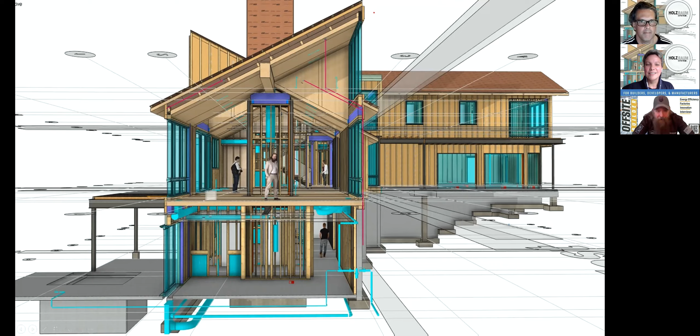Talking about our team, this is us. We are three co-founders of HolzRaum System, and we always think it's important to introduce ourselves because it makes it a little easier to understand why we're doing what we're doing, since we're looking at a lot of different perspectives, coming from a lot of different backgrounds.

So I am an architect. I was trained in Germany, and I'm also a certified passive house consultant, and I really like to do energy modeling. And then there's David Hessler.

He is actually a biologist and a software developer. And then Steve Hessler, he is a passive house builder, a certified passive house consultant, and also a timber frame and structural designer with a background in CNC production of building components. So there's quite a bit of different things that we always think about and talk about.

Steve and I actually met, I think, around 2015 at the first Passive House gathering in Philadelphia. Philadelphia by now is a pretty active Passive House community, but back then there was nothing really there. So it was really nice to finally connect with other like-minded people in terms of Passive House.

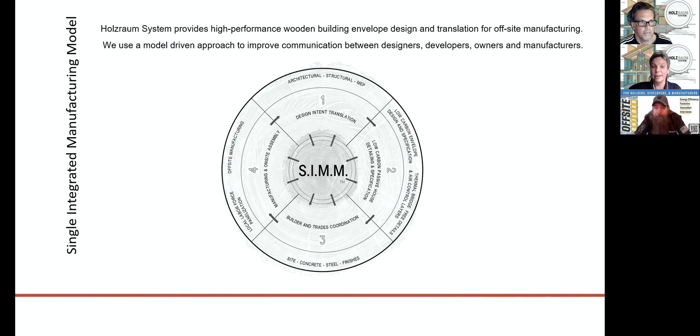So this is the project we're talking about: a very large single family home in Big Sky, Montana by Reid Smith Architect. This is actually a hybrid between a CLT floor and roof system and light framed panels. It's a pretty intense and complicated project, and we didn't want to show it to scare people away, but just to show what's possible with this kind of approach.

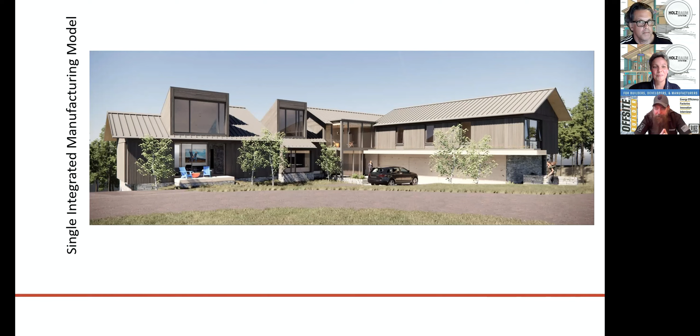To kind of highlight what a SIMM is, we need to show and explain what a BIM is first. What we get a lot of times is a BIM model or a volumetric model from architects. Volumetric models are really good at conveying design intent, and for the architect to communicate in conveying construction strategies and explaining spatial relationships between assemblies and building components.

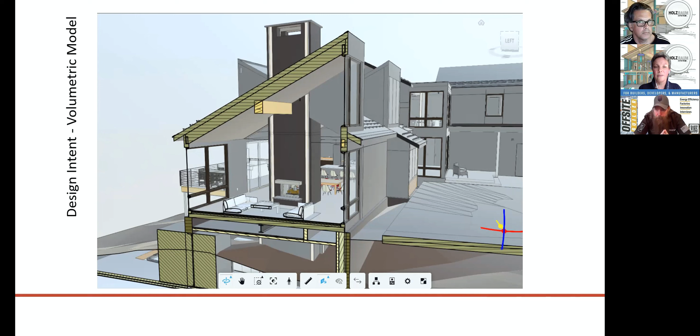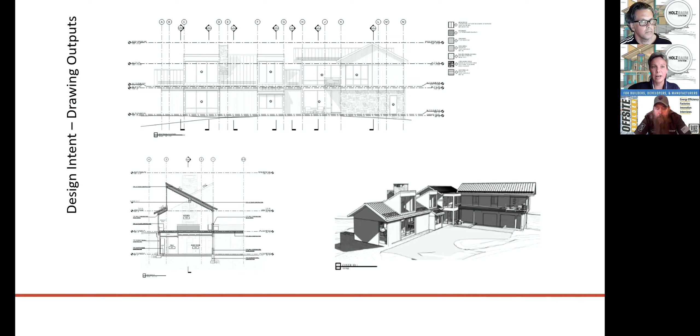The outputs for a BIM model, or in this case a Revit model, are what we kind of know: floor plans, elevations, sections. This is very good at architectural documentation and is absolutely needed in the design process. It's really good at showing your elevations, your heights, your schedules, window schedules, finishes schedules, and all of this.

So then this, on the other hand, is a parts-based model, and that's what it looks like. You can see the difference. We moved something that was a volumetric model into something that shows every single piece that building is built with.

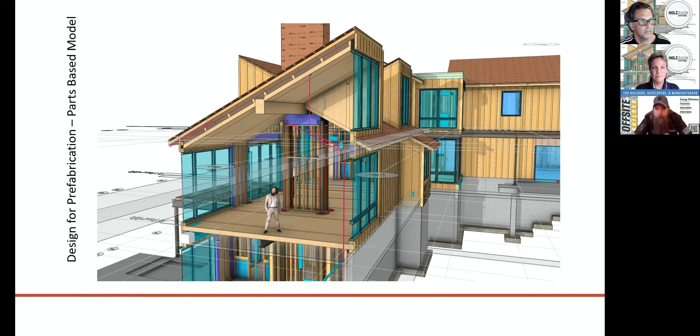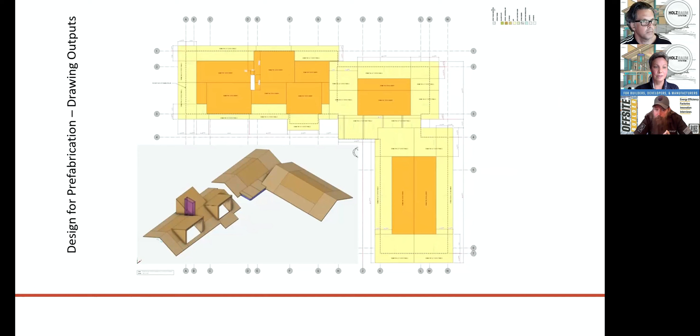This is basically the outputs of a SIMM model, which is very different from the outputs that we saw before, because this is, for example, a 2D geometry review set, and it includes installation drawings and panel shop drawings, and in some cases machine files.

If the decision was made to off-site manufacture a panel, then the design intent must get translated into actual parts, and a 3D parts-based model is necessary. That's a really important step: once you make the decision to go with pre-manufacturing, you need a parts-based model, there's no way around it. With modular building it's slightly different, but if you go with panelized, you just have to do it.

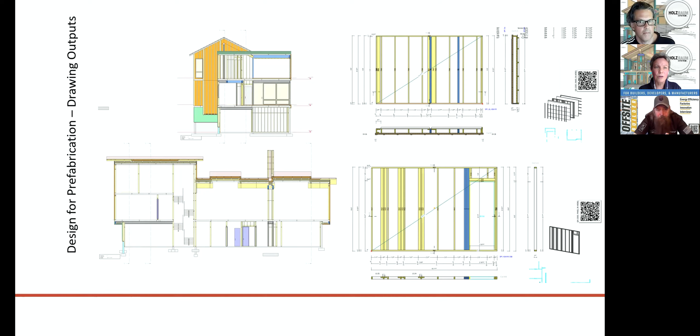That's kind of where we saw our opportunity, because once you have this parts-based model that has to be built for everything the manufacturer is going to produce, there's quite a bit more opportunities that can be taken advantage of.

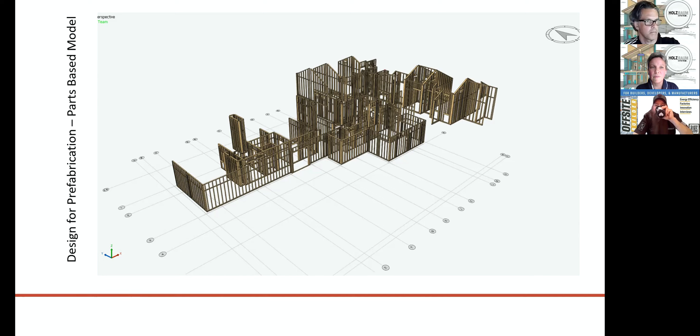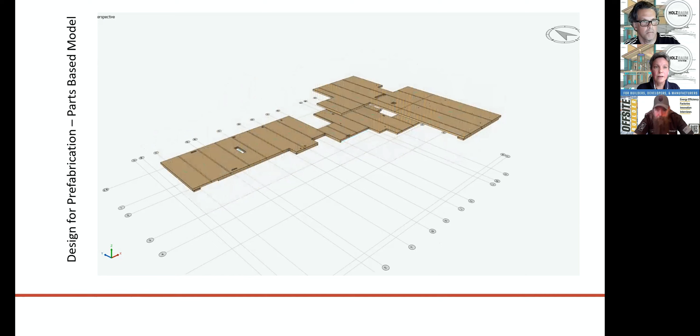This is just showing what the manufacturer, if it wasn't our SIMM modeling approach, would actually produce, which is basically what they are going to build. So this is a model that would come from a manufacturer. These are exterior walls, and in this case CLT floor panels, roof panels.

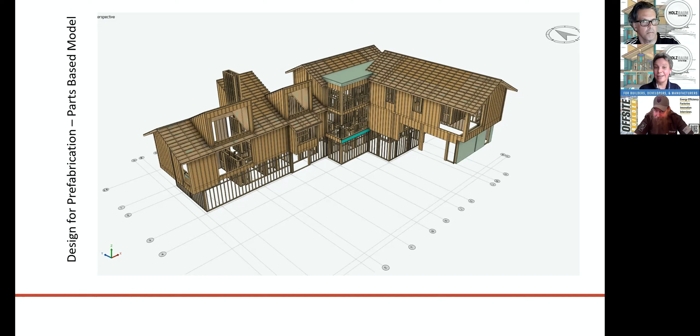Once we have all these basically production fidelity building components modeled, we saw quite a bit of opportunity to align and clash detect these parts against all of the other building perspectives. That's kind of where the SIMM comes in, where all of a sudden, because we have this model, we can start looking at the load path, for example.

This model was provided by the structural engineer, so we actually didn't model it ourselves. We had to tweak it, but we try to use everything that we can get from engineers and integrate that into our model. So we don't always model everything ourselves, we're trying to reduce redundancy.

And then we were able to check this against foundation drawings and actually generate the model that works with the foundation drawings. And then we are able to feed that back out to the on-site construction manager to check dimensions.

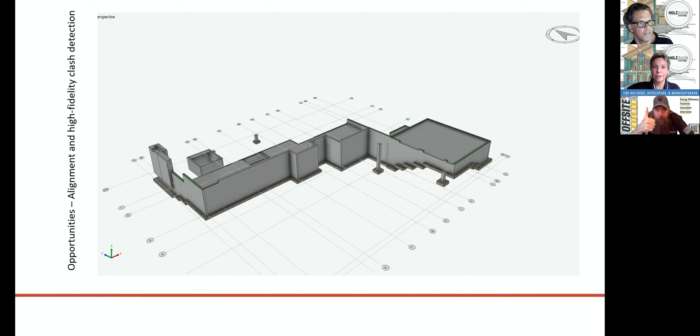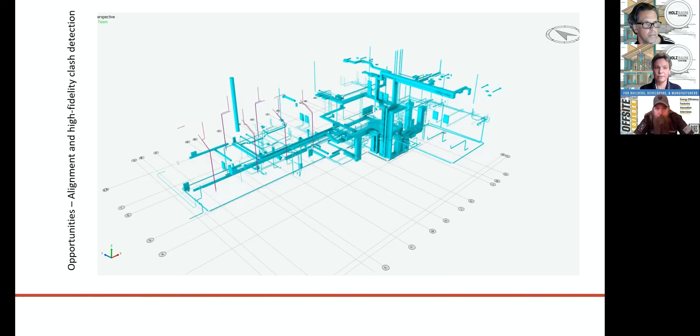Then we are integrating the whole MEP model. Again, this was not built by us, this was given to us. This is a Revit model that we were able to integrate into our SIMM.

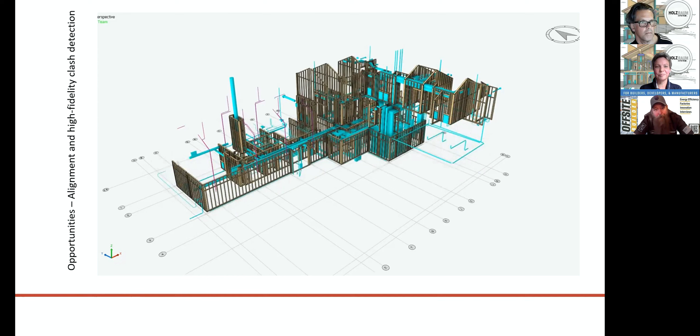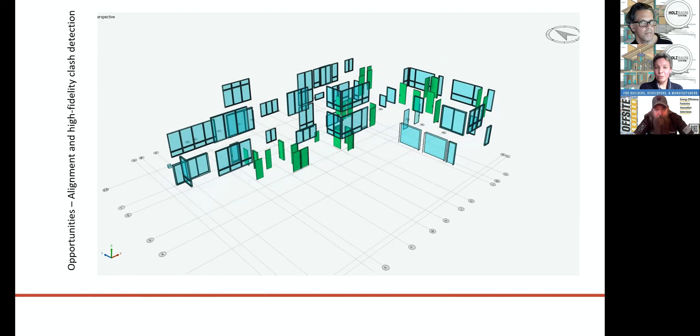And then we go ahead and really look at all these different perspectives against each other: the load path, the foundation work, the interior walls, the floor panels, the roof panels, accurate window and door units and their placement. That was again defined by the architect's Revit model, so that definitely has a lot of value in terms of geometry and where things are.

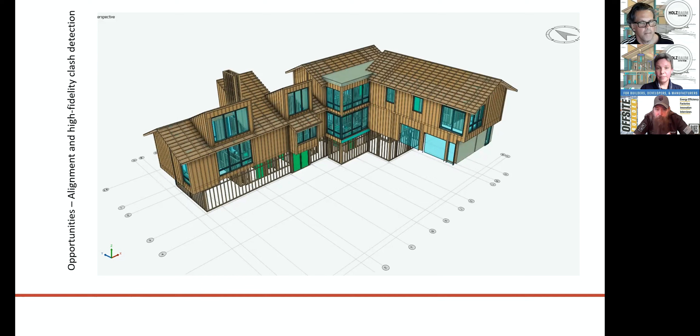And then, this is basically looking at a holistic model at the end, and Steve will show a little bit more of what that model actually looks like.

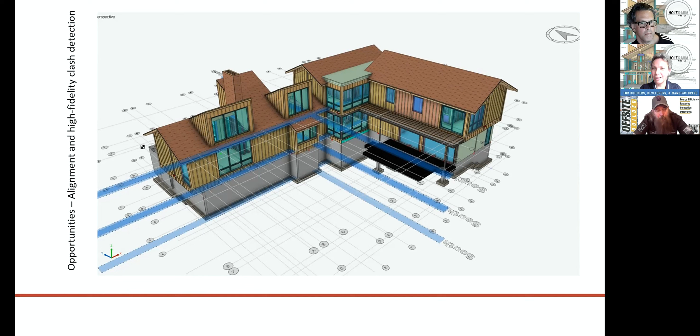And then to take it a step further in this project, we were able to actually integrate a terrain model, or we were asked to integrate a terrain model, which was provided by the excavation contractor. And then again, we checked it against the concrete.

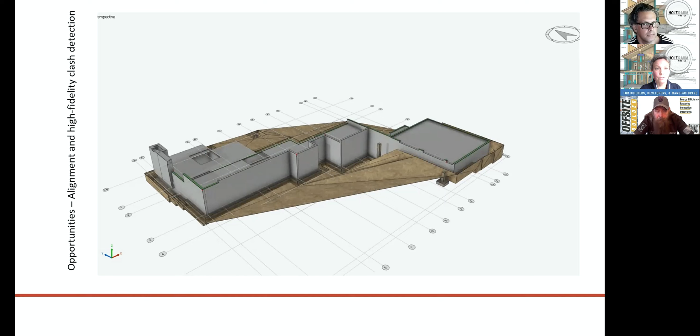So then overall, all of our details are developed with focus on airtight transitions and thermal bridge free connections. So I think that's kind of where my perspective comes in a lot of times, with energy modeling and being the air sealing person, guru.

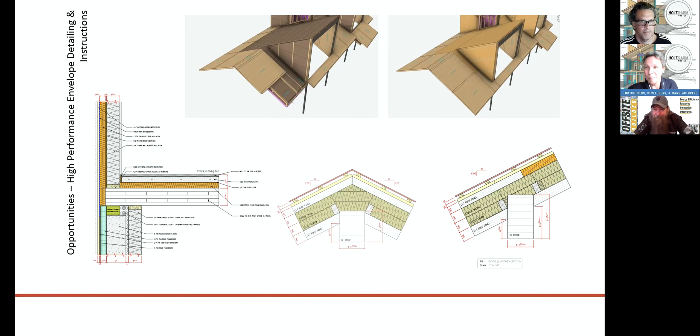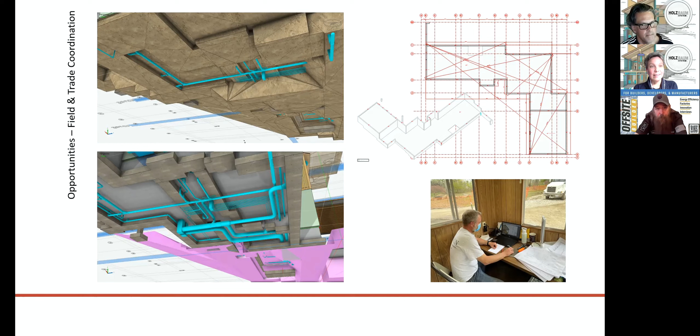He's using it to locate nailing for some specific siding facades. Yeah, so again, further down the road, it's a communication tool. You can turn it, you can twist it, and everyone looks at the same thing at the same time, right?

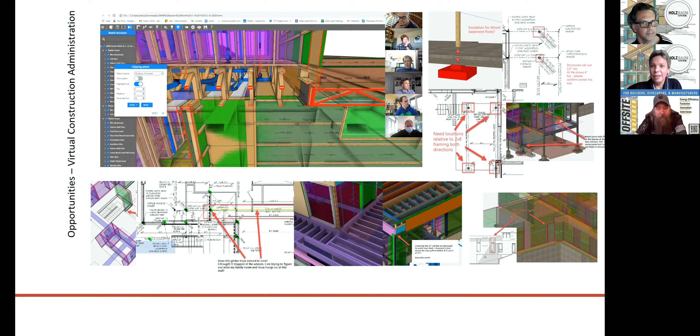And so this is what communication looks like in the SIM world, and it can look a little messy, right? But you can see that there's a lot of people looking at it at the same time. And yeah, we can make decisions on screen very quickly with everyone engaged, but we did see that we needed some way of coordinating or organizing that chaos a little bit.

So we went ahead, and that's where David, our third party, came in as a software developer, where we developed the SIM model basically as a visual database. And this is our software that's called Catch, which is basically harvesting information out of our visual database in a format that users can then use however they see fit.

And also integral into this process, it's kind of the part of herding cats, because we're dealing with a lot of people. So part of this software is an issue tracker and data storage and a few other things that we're happy to talk about later on as well.

And key to that, and I'm sure Steve is going to show that a little bit more, is data attachment. So every little piece, and that's something that's a little different too, compared to a BIM model where yes, you have layers, your walls, you can set up all these layers and there is data, but it's basically one wall, right? For us, it's every little piece that we create, if it's a screw, if it's a beam, if it's a post, can get data attached to it pretty much unlimited.

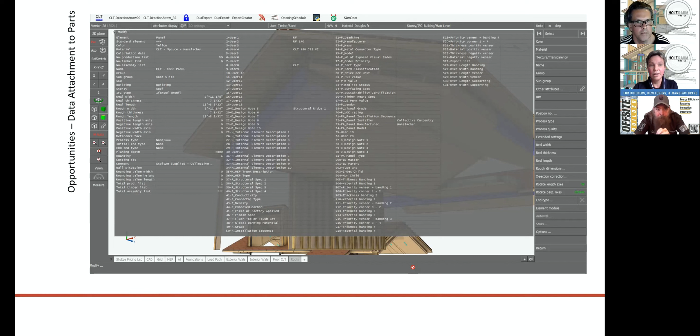And that data then, we're able to catch it or harvest it in a way that makes sense to everyone engaged.

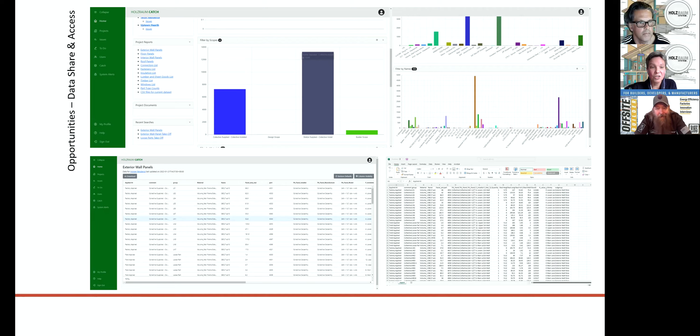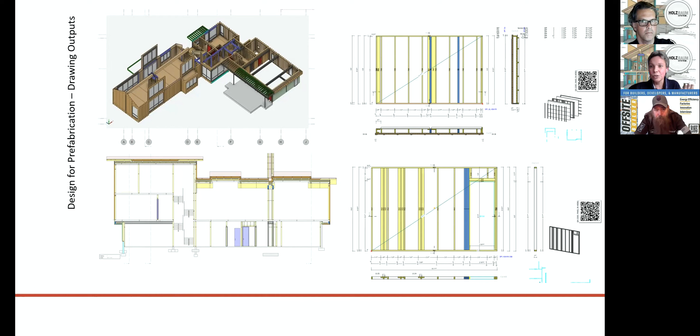And then out of that model, we basically export these 2D drawings for contractors that might want to build them in their shop, or have maybe a half automated production line. And we see a lot of potential in really engaging broadly builders locally that want to build those panels, so that we can really scale this up.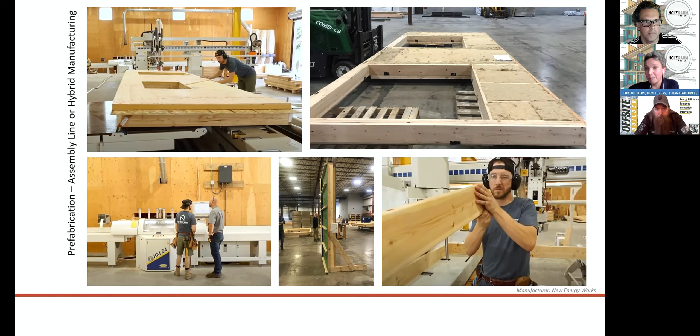And then alternatively, we can also, out of the same SIM model, export machine files for highly automated manufacturing facilities. So yeah, that's basically our process.

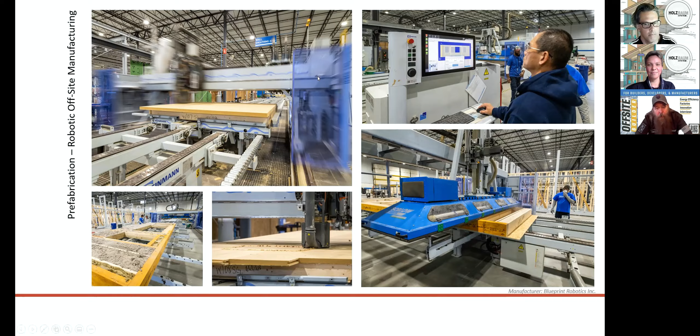Okay, it's incredible because every process you take us through is inclusive, right? It's receiving all the information from the various experts at hand, it's compiling it, and you used a phrase to make sure that the structural and mechanical didn't interfere with one another. Used a unique phrase for that, clash detection.

Incredible, and all those layers coming up with it. And Catch, when you brought me into Catch, I was like, all these tools are ready for bringing all the answers and files needed for panelized facility over here, CLT facility over here, and a stream of manufacturer parts and pieces here, there, and everywhere. It's a wonder buildings get built without this.

I'm mesmerized. Steve, I know you got a lot to add, but Ilka, this is tremendous, and you have the mic, my friend. All right, awesome. Thank you, Ilka, that was a great overview.

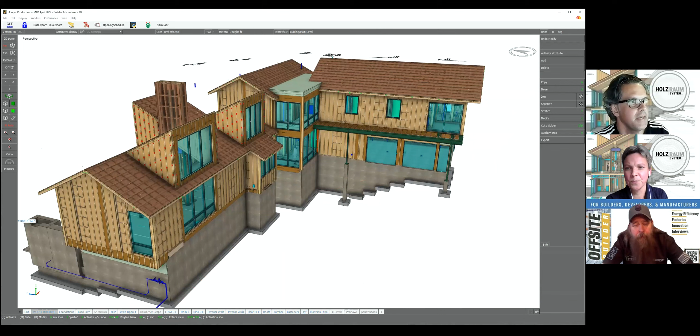This is actually the complete model, and what's kind of fun is that this is actually the version we sent to Builder. So even though it all comes from one model, we can tune some versions because different audiences have different purposes, but the content always comes from a final frozen production model.

We actually just got to the part with this project about 3 or 4 weeks ago where we finally absolutely froze, and Collective Carpentry is fabricating the wall panels, so they have all their wall panel drawings. All the production numbers for all the parts are frozen. And when we get to that point, we can release a version for the builder.

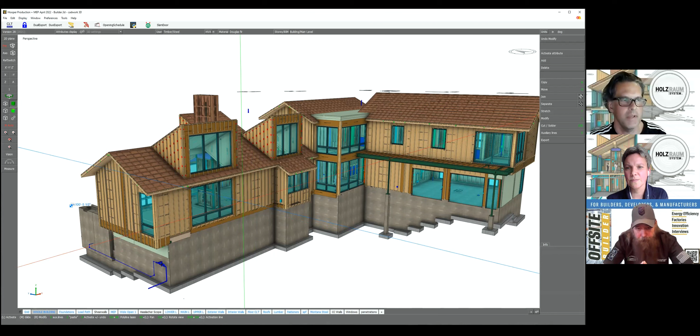So the builder actually has this model. I'll break it down a little bit, but they can grab it, and they have cadwork, so they can actually open up this model. They can't edit it, but they can grab a lot of the things I'm going to show you.

So we organize the model, you know, when we bring the design content from others, like our collaborators, it comes in from all different kinds of sources. It could be from Revit models from 4 or 5 different people, could be 2D CAD, could be just about any format.

Our job is to bring it in, filter out what's useful, and not necessarily discard the other stuff, but sort of put it out of the way, like putting it on the shelf. One of the ways we do that is we organize the building from the very beginning into what we call slices, scope slices.

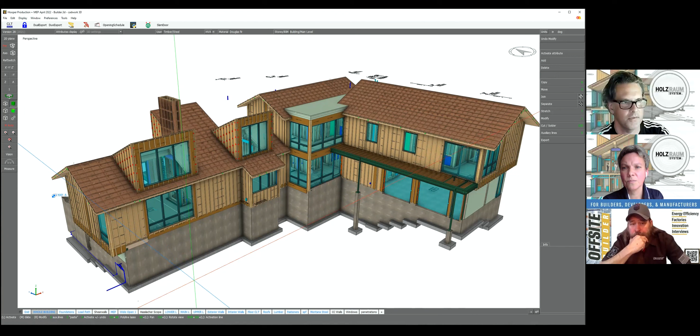So right now, all these scene tabs down here are just some of the scope slices and perspectives. We can do it on many, many different levels. But for instance, I'll just real quickly show you, so this is sort of the building.

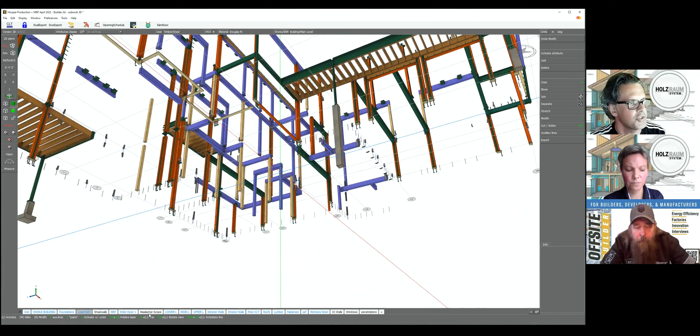And then we can look at the foundation. These are some of the load path members, so these are all local steel, and the blue is glulam parts, US glulam. There's also, I can jump over to, this is the imported CLT and some glulam parts.

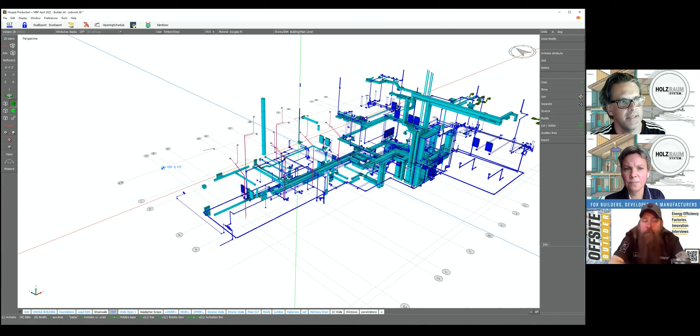So I'm going to show you how we can start to put these things together. But the point is, we break these things into individual slices, and that's one way to navigate the content very quickly. That's something we also really love about a SIM model versus a BIM model, is that we can navigate parts like light speed, whereas it's not so with BIM.

First of all, a lot of the parts aren't in a BIM model, but even if they were, you're limited a little bit by layers. Layers are great, but there are so many layers in a BIM model. What's great about this is that if I go look at the lumber—

This is all the lumber that is in the project. It's not the CLT, but it's all the spruce pine fir, the LVL, the plywood. It's things that you could get from a lumber supplier.

And what's great is if I click on one part and look at all the properties, there is a lot of data attached. You can see there's a lot of blank attribute layers, but there's also a lot of layers that are attached, and there's sort of an unlimited number of layers that could get attached.

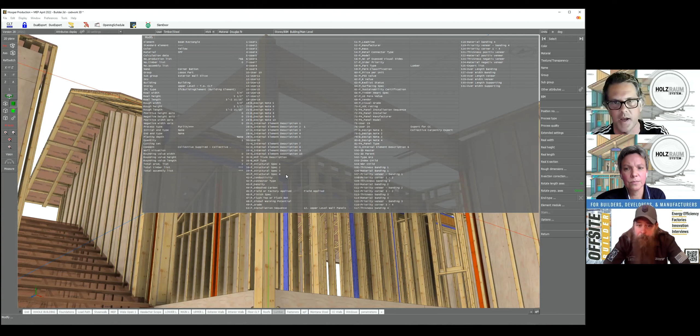Just from this screen, I know what the part number is, but I also know what panel it goes in, and if it's field applied or factory applied. There's basically unlimited data that you can attach to a part, and as soon as you attach data, every one of those attribute layers becomes a navigation tool in the SIMM.

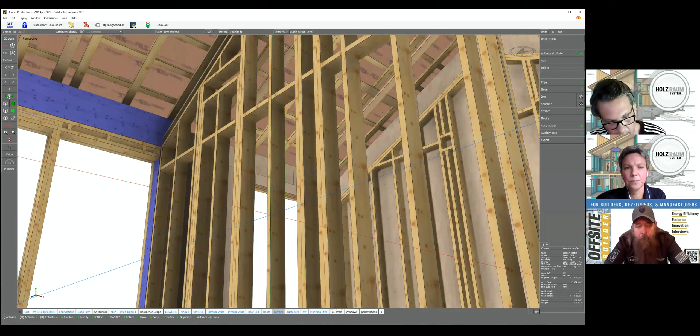For instance, if I have this part active and now everything's back on screen, I might be interested in looking at all the parts that share the same material. So I can activate along material type, and now, instead of 20,000 parts on the screen, I'm looking at just those parts.

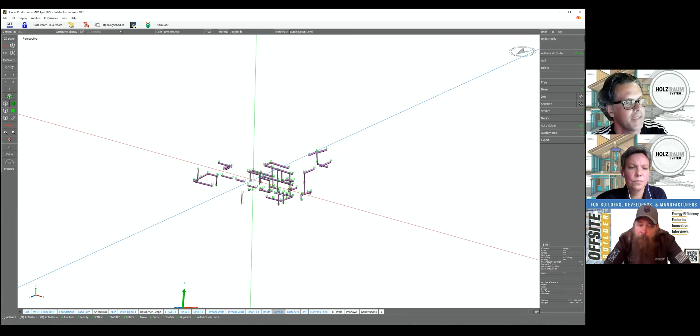If I want to look at all the glue lam parts because I activated along the same material, but I'm interested in what that looks like against the steel, I can bring in the steel. And if I want to see what that looks like next to the MEP, let's do a quick look, maybe bring the MEP engineer into a Zoom and see where you've got to clash somewhere.

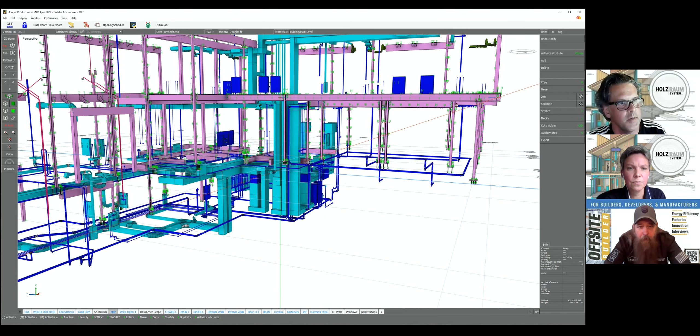Basically, because it's actually the data, the more data, the better. It creates all these little opportunities to navigate and filter content in and out. So let me go back to some of these scene tabs on the bottom.

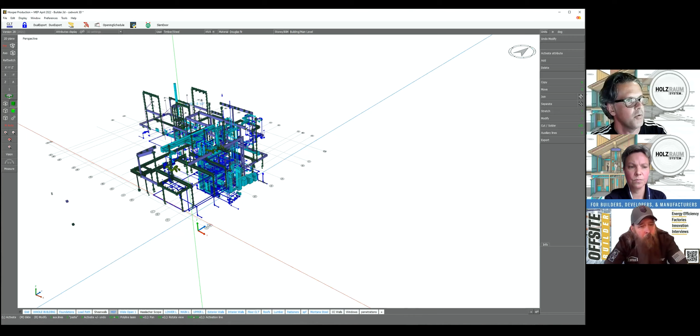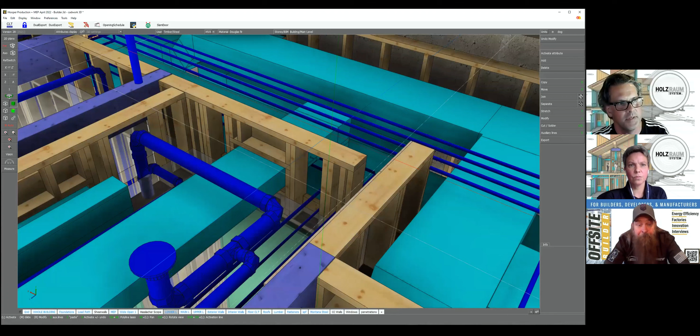Now we're looking at the lower level of the floor. I'll leave the MEP in on a couple of these, but you can imagine how useful this is in our meetings, when we're talking about how literally every interior wall framing has been clash detected and clearances created for MEP and everything else.

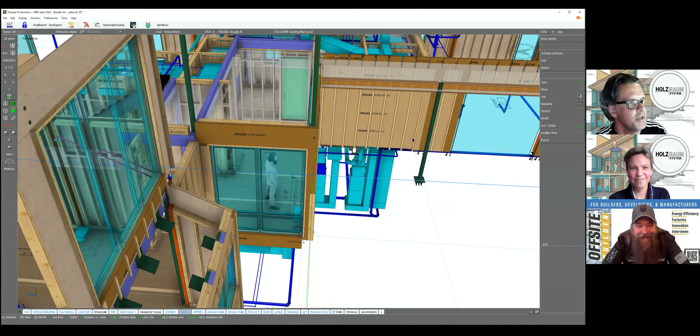On the main level, there was a lot of work with the CLT. That's a model of Mark right there. I'll show you more on the CLT in a second.

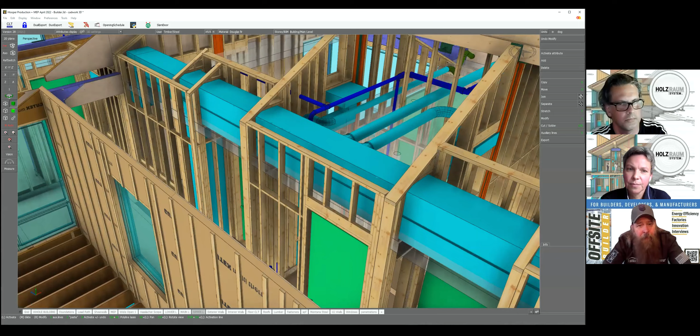I'm also seeing an option to understand the critical path and the sequencing, because often when we have these pre-made partitions and the glulam coming in with those different layers, it gives people foreshadowing of knowing what crew is coming up and what to expect, because we don't have that on a 24 by 36 black and white piece of paper. No, that's a great point.

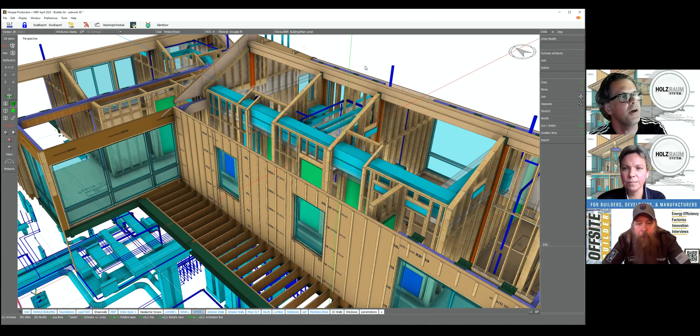If I take this part, I know it ends up in wall U10. And if I look at the sequence, there are 17 sequences in the building. This right here says part installation sequence, sequence number 12, upper level wall panels. I can do that for 20,000 parts in the model.

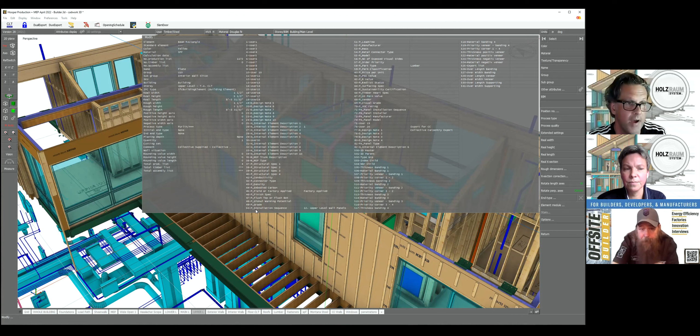Actually, this is kind of nice, I can say activate along a sequence. These are some custom HolzRaum sequences - go to installation sequence, see all our sequences. So now I could say I want to see everything in load path wood on 7. Now it should be all active. And now I'm looking at load path members for sequence 7.

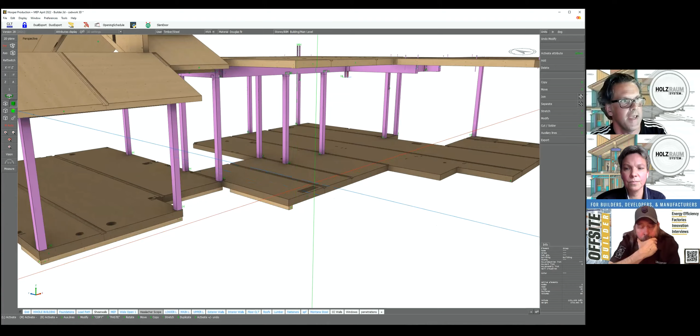And then I can say, okay, how does that look on top of the CLT? So I'll go back to Haslacher, and now I'm looking at what that would look like on top of the first floor CLT installation. It's cool because you can just mix and match between those attribute layers.

That's what I love. So we've been looking at sequence, then we moved to scope, now we're going to move to SPF. I want to look at what the SPF looks like - well, now I'm looking at all the SPF. So you can just jump around between those perspectives.

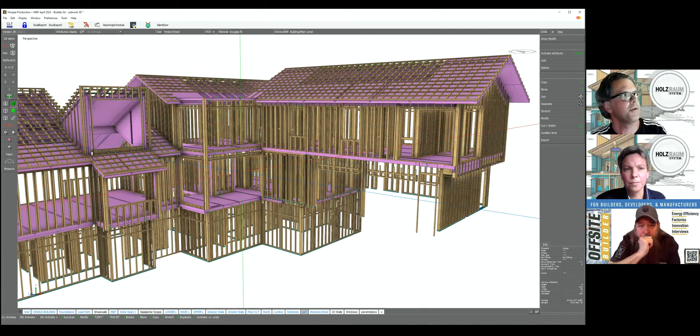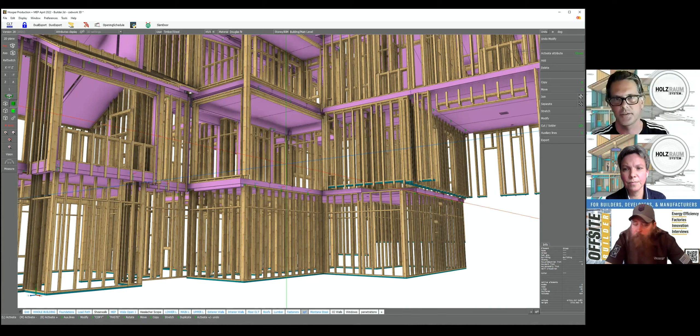Every one of those attribute layers, whether it's material, sequence, Haslacher scope, vendor, all of those things become a perspective, and you don't have to just be looking at first floor, second floor, third floor. They all become layers - that's what I really love about this thing.

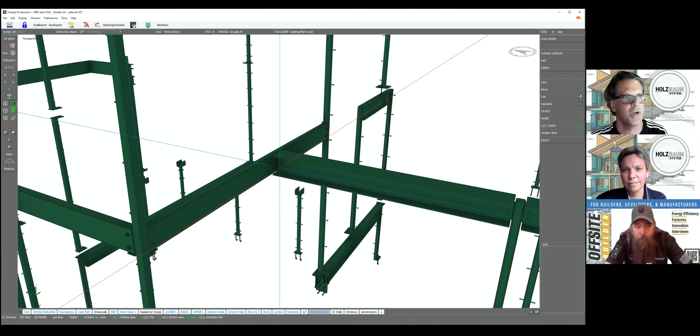I also want to give a shout out - this is one of the most unbelievable steel models we've ever gotten, and we think there's a gigantic opportunity for collaboration. We love good modelers - good modelers make our job really easy. This model is dead accurate, and it allows me to coordinate all of my SPF, all my everything, my CLT.

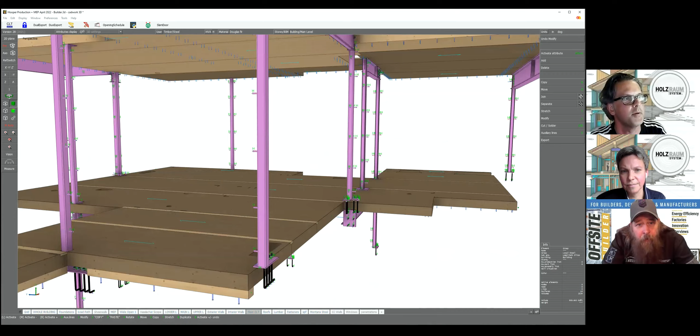So if I look at my CLT, is that accurate? I'm not worried at all about this because I had a phenomenal partner that worked with us. And if I want to look at the steel against the MEP, I also had a phenomenal MEP contractor, and they were willing to put the time in to make sure we had the format we needed.

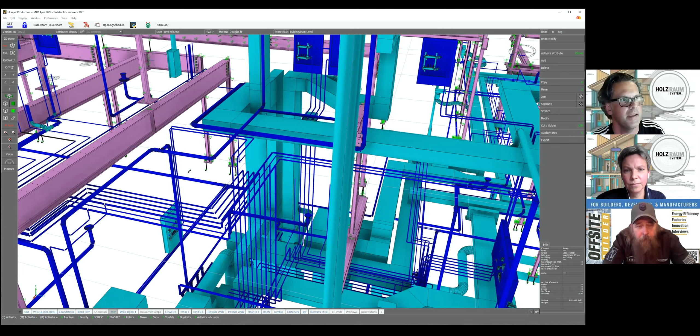What we would do is, they'd say, well, you're the only one that has all the content. So we would clash detect between structure, steel, and MEP, and we'd hold meetings and show them this stuff. Then they'd go back to their office and fix it and send it back. Finally, we'd end up with an absolutely cleared model. And of course, the architect is involved the whole time.

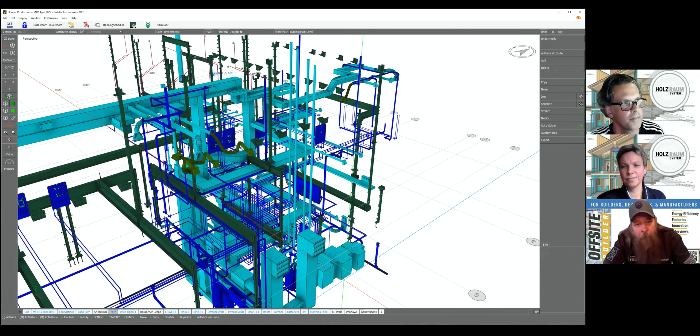Just looking at the drawing alone, Ilka and Steve, I noticed the cost savings because I can see when you show me the structure of the steel that it's already coded, whether it's an I-beam or a C-channel. And I know the fasteners, I know where it's going. I can almost tell you what size it is just from the 30 seconds I've seen you flash across the screen.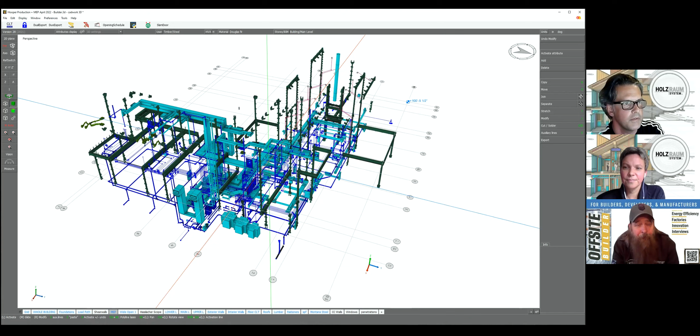That's insightful. Yeah, so let me show you a little bit more. You mentioned fasteners — I'm going to show you the roof system on the CLT, it's pretty cool.

Look at that, you don't necessarily need all the MEP. I'm going to just go with the roof right now. But what's really great about CLT and timber is for this kind of process, this works great with light frame panelization, but it also works really well... it's lagging, hold on a sec.

This is like building an airplane. All the components are decided, they're all made here, there, and everywhere. Each part and piece comes in together, and we're flying high. This is the Star Wars of the construction industry.

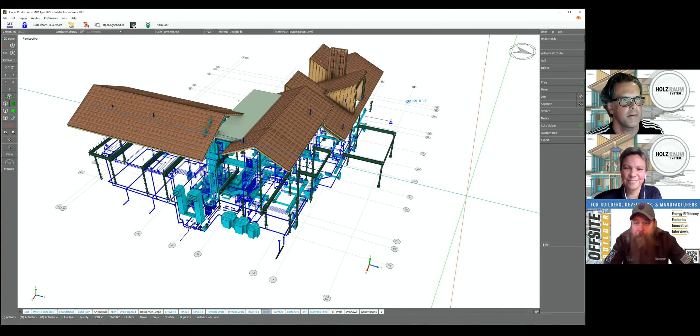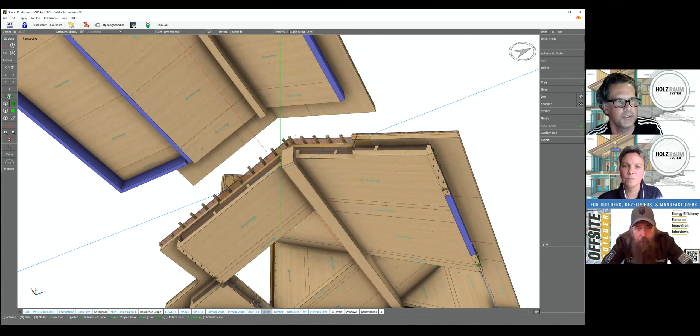So now I turned off the MEP, and now I can really look at this — the blue is our glulam that's going to be sourced in the US, but everything else on here is pretty much an import, all pre-cut and a lot of pre-drilled, from a company called HolzRaum in Austria.

So if I look at just the fasteners, these are the fasteners — I think we got down to 8,500 fasteners. Each fastener is a very specific application. And just like all the other parts in the model, it holds data that's really important to make sure things get in the right place.

For instance, the manufacturer from the CLT company basically got our model, and all the CNC work from HolzRaum comes from this model as well. But they get an indication for the people ordering it — this is not going to be pre-drilled. So that means the factory knows it's not pre-drilled. It goes to zone R1. It says who's going to install it, who's going to provide it, and in this case it's a loose part, so it's not going to be put into an assembly.

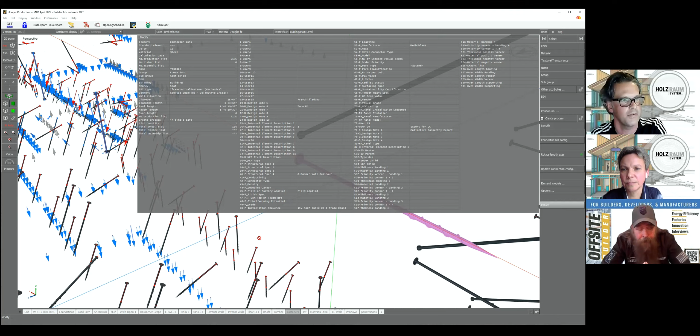So anyway, there's just a lot of different things — as soon as you have the part and you can attach data, you can really navigate the unknown a little bit. One last thing I'll show you that I also really like is, again, bringing in content from our collaborators.

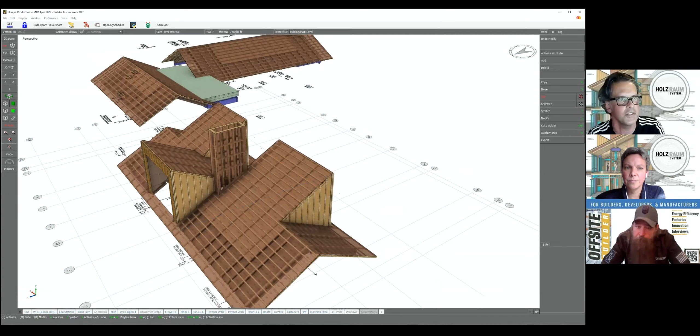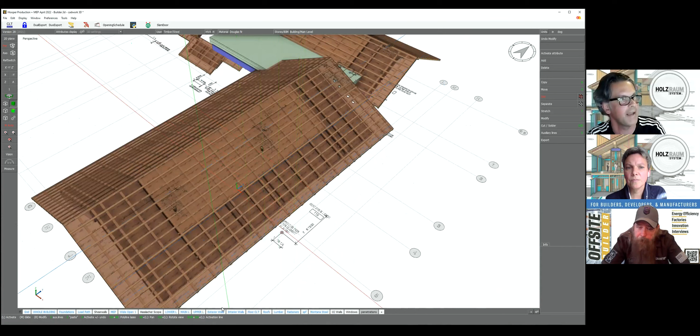This doesn't look like much, but this is CAD from the MEP engineer. They gave us the MEP model, but then they also gave us this old school CAD. Having this old school CAD locked into this, frozen in this model, means that nobody can later come back and say, why is that happening right here — because it's in the model, and this is where it goes. So our model is really — what we're doing is we're just not saying it has to be some flashy 3D model.

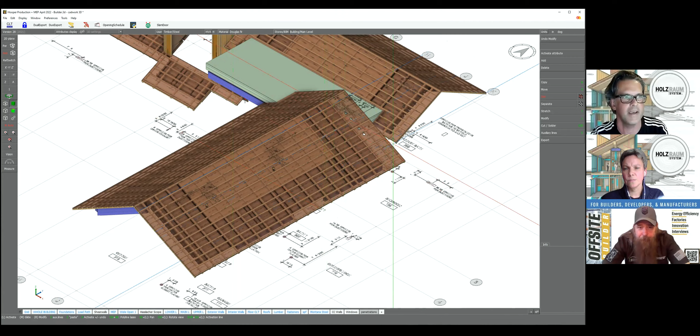We're saying, how can we bring in content from collaborators used to working in different ways, but still put it in the same place? I don't want to have to open a 2D DXF file and try to tell you where it goes. How about you just take the DXF file, put it in the model, and we all agree this is where it goes. Then if I turn on the MEP, it all aligns with CAD. We've barely scratched the surface on how to be flexible with our design teammates and builder teammates, trying to figure out what works for them, so we can bring it into the same model. At the end of the day, it's like putting a bunch of languages together.

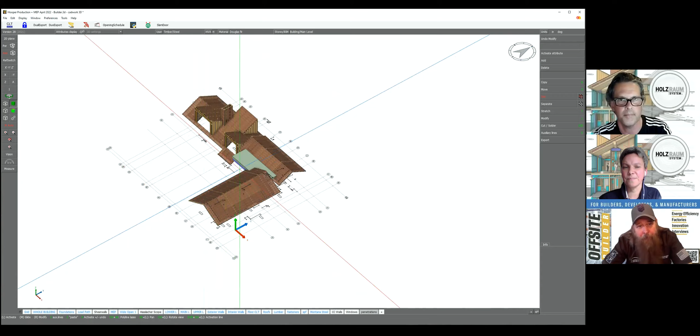That's exactly how I see it, you happen to have a fine example of all the different partners at play and the detail they went into so it could be made properly, made once, and shipped out with confidence. Their example is set for other manufacturers to have their parts, pieces, and components done to this level. No one wants to make things more than once, so it's all there in a single integrated manufacturing model.

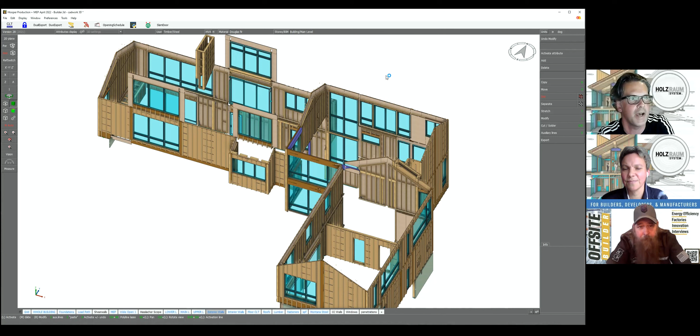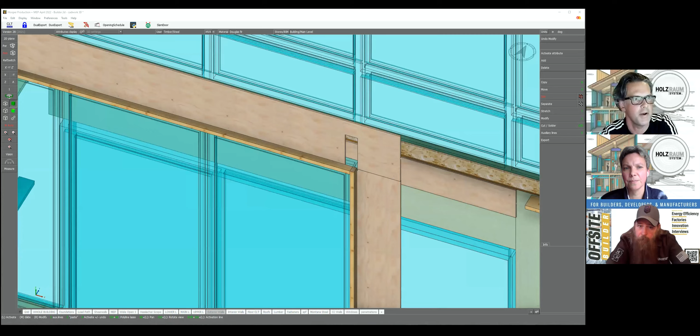I was going to show you one more thing because I just can't resist. These are all the exterior wall panels that Collective Carpentry are doing. What's really great is I can decide what panels I want to look at and just basically rifle through. Before we're ready to deliver shop drawings, we can rifle through content and make sure everything seems included. In this case, it's got hold-downs included, plywood. There's so many different ways to navigate—you can pick the attribute layer you want to navigate along and just fly through the content.

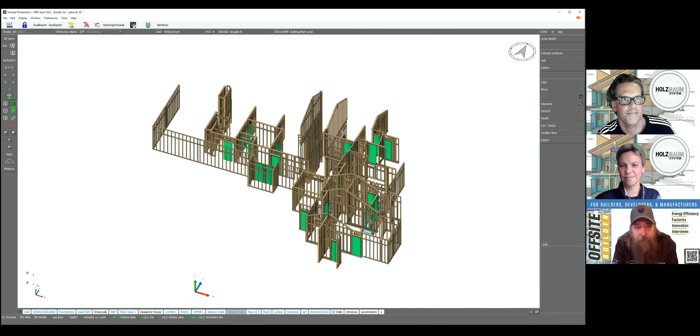I think that's mostly what I was going to show you. It's all precision based—gone are the days where you said it looks good from my house. And the fact that this is different languages is how you said it, really picked my ears.